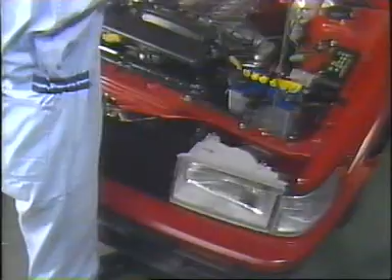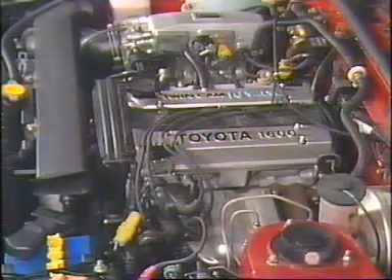In Volume 1 of What is TCCS, we talked only about EFI. Now in Volume 2, we will discuss the other remaining TCCS functions: Electronic Spark Advance (ESA), Idle Speed Control System (ISC), a special air intake control device called Toyota Variable Induction System (TVIS), the diagnostic function, the fail-safe function, and the backup function.

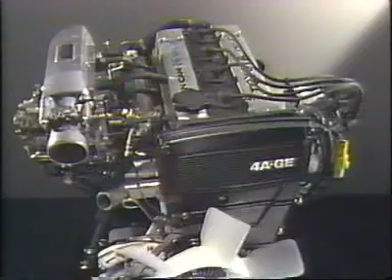The TCCS is used with various engine models, and although the TCCS construction and operation for a particular engine may differ from those for other engines, we would like you to remember that all TCCSs operate in basically the same way. In this video presentation, we will focus on the TCCS that is used with the 4AGE engine.

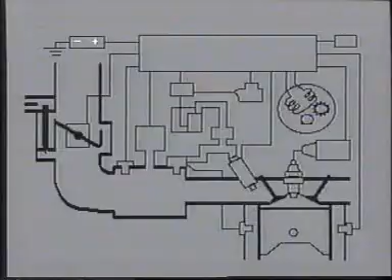Now let's take a look at the Electronic Spark Advance, or ESA. First, let's talk about the sensors. A pair of sensors is built into the distributor. One is the NE pickup sensor, which detects the crankshaft angle and the engine speed. The other is the G pickup sensor, which detects the standard crankshaft angle. The vacuum sensor detects the intake manifold pressure.

The throttle position sensor has two functions: it detects whether or not the throttle is fully closed, and it detects the throttle opening angle. When the engine is cranking, the ST terminal of the ignition switch informs the ECU of this. The water temperature sensor detects the temperature of the engine coolant.

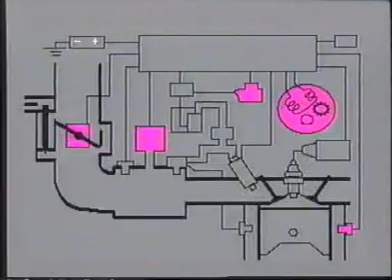Each sensor sends a signal to the ECU in the form of either a voltage or a pulse signal. Furthermore, as long as the air conditioner is operating, the air conditioner amplifier outputs a voltage signal that keeps the ECU informed of this. The ECU calculates the ignition timing that best fits the running conditions of the engine based on signals from the various sensors and data stored in its memory. It then sends an appropriate ignition signal to the igniter.

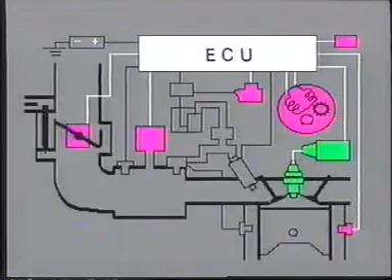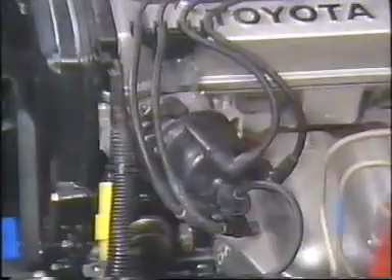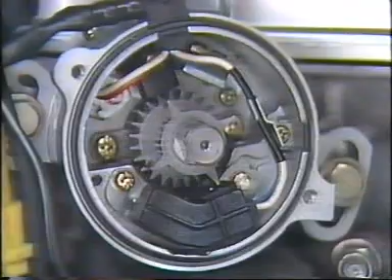Therefore, the distributor on an ESA-equipped engine is constructed somewhat differently from that used with a non-ESA engine. Let's see what a distributor used on an ESA-equipped engine looks like. As you can see here, it does not have a mechanical governor advancer or vacuum advancer.

Instead, it has two pickup sensors. As we explained before, one is the NE pickup sensor, which detects the crankshaft angle and engine RPM. The other is the G pickup sensor, which detects the standard crankshaft angle, which is used by the ECU in determining the output timing of the ignition signals.

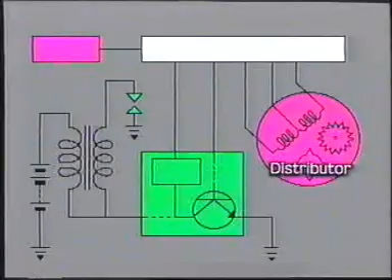Let's see just how the ESA system controls the ignition timing. We are now looking at the basic circuit diagram of the ESA. As you can see, the ESA system consists of the distributor, various other sensors, the ECU, the igniter, the ignition coil, and the spark plugs.

The ECU receives signals from the sensors that detect the running conditions of the engine. It also contains optimum data regarding ignition timing. The ECU selects an optimum ignition timing from this stored data based on the signals it receives from the sensors. Just before the crankshaft reaches the angle at which ignition is to take place, the ECU sends an ignition, or IGT, signal to the igniter.

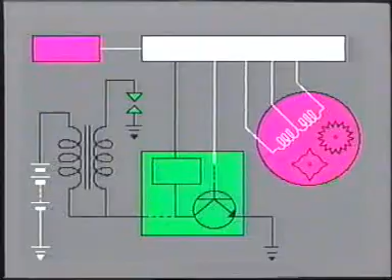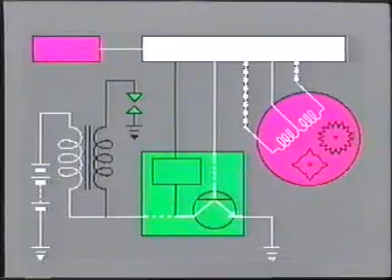Based on this signal, the igniter actuates its power transistor, causing current to flow to the primary coil. When the crankshaft rotates to the ignition angle, the ECU stops sending the ignition signal to the igniter. This causes the igniter's power transistor to be turned off, halting the flow of current to the primary coil. This, in turn, causes a high voltage to be generated in the secondary coil, causing the spark plug to fire.

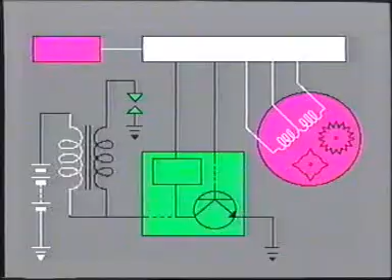At the same time, counter-electromotive force is generated in the primary coil, so the igniter accordingly sends an ignition confirmation, or IGF, signal to the ECU.

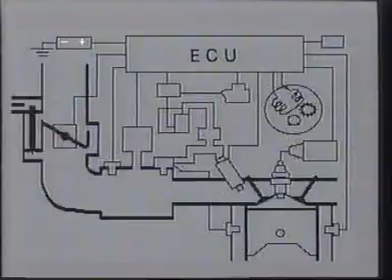Now we will see briefly how ignition timing is controlled. In the ESA, ignition advance is determined by three factors: the initial ignition timing, which is determined by the angle at which the distributor is physically fitted to the engine block; the basic ignition advance angle; and other supplementary ignition advance angles. The latter two, that is the basic ignition advance angle and the other supplementary advance angles, are controlled by the ECU.

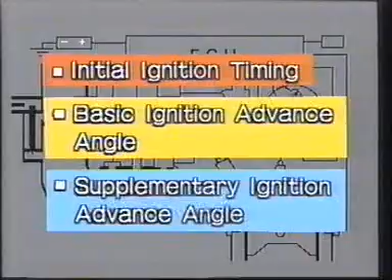Now let's see how the ignition timing is controlled in accordance with the driving conditions, beginning from the moment the engine is cranked.

During cranking, and immediately after the engine has started, the ECU cannot calculate ignition timing accurately because the engine's speed is not yet stable. For this reason, the ECU does not calculate the amount of advance when the starter motor is operating or when the engine's speed is low. Instead, the ignition timing at these times is fixed at 10 degrees before top dead center, as determined by the angle to which the distributor is physically set when mounted. This is referred to as initial ignition timing.

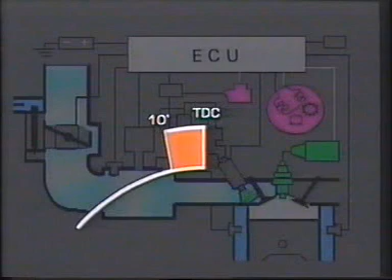The ignition timing at this moment may be shown graphically like this.

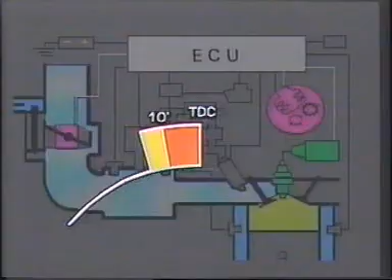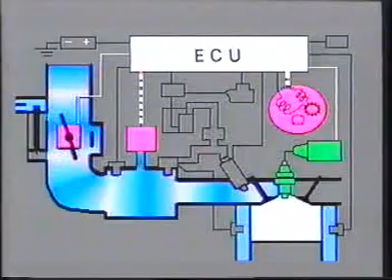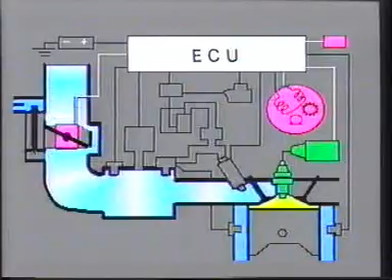Now, what will happen when the accelerator pedal is depressed? The ECU judges from the signals sent by the throttle position sensor that the accelerator pedal has been depressed. It then determines a basic advance angle based not only on the engine RPM, but also on the manifold pressure. Furthermore, the ECU adds other corrective advance angles in accordance with engine conditions, such as when the air conditioner is operating while the engine is idling, or when the coolant temperature is low. These are referred to as supplementary ignition advance angles and are shown in blue on the graph.

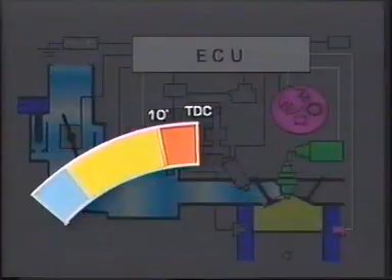Next, we'll talk about the idle speed control, or ISC. The VSV-type ISC is used with the 4A-GE engine.

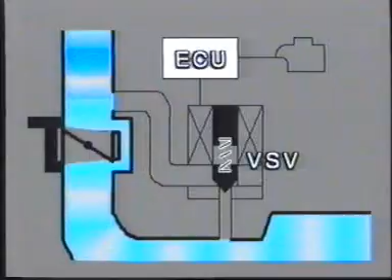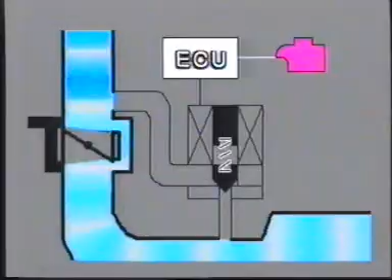We will now illustrate how the VSV-type idle speed control works. As you can see here, a bypass is provided between the throttle body and the intake air chamber. In this illustration, the bypass passage is closed off by the vacuum switching valve, or VSV. While the engine is cranking, the ECU is informed of this by the signals from the ST terminal of the ignition switch. Based on these signals, the ECU sends current to the VSV. As you can see here, the bypass passage opens up so that more air can flow into the intake air chamber. This is to make engine starting easier.

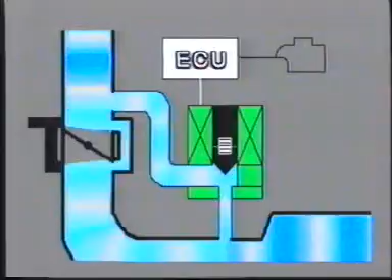Immediately after the engine has started, the ECU continues to send current to the VSV for 10 seconds in order to stabilize the engine idling speed. After 10 seconds have passed, the ECU stops sending current to the VSV.

Now, we'll discuss the Toyota Variable Induction System, or TVIS. TVIS is designed to improve the efficiency of air induction into each cylinder throughout all engine speed ranges. This is also controlled by the ECU based on the engine RPM signals. Let's look at another illustration that shows TVIS functions.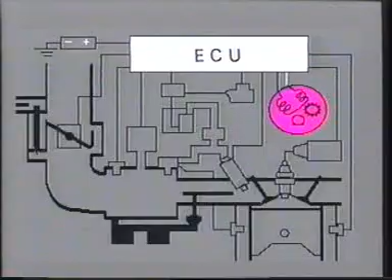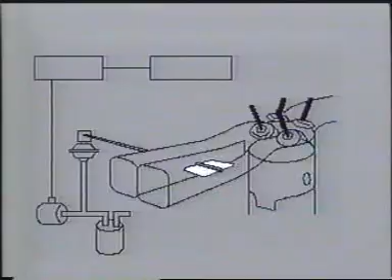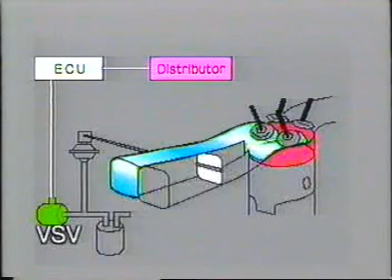As you can see here, each intake manifold is divided into 2 passages, and an air control valve is fitted in one of these passages. When the engine is running at low to medium speeds, the ECU causes current to flow to the vacuum switching valve, or VSV, to close the air control valve. Therefore, air passes through the manifold at a high speed. The air intake efficiency is improved in these speed ranges due to the inertia of the moving air. Closing the air control valve also creates a strong swirl, which improves combustion stability.

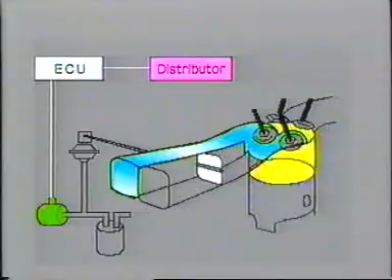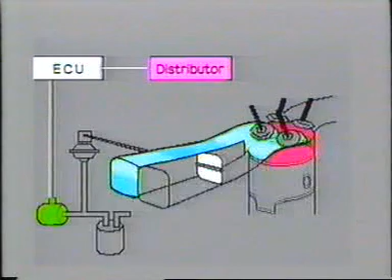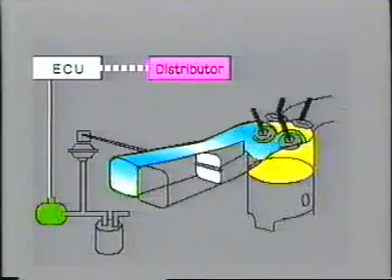However, induction resistance increases as the engine speed rises. When the engine RPM increases beyond the medium speed range, the ECU stops current flow to the VSV. This causes the air control valve to open so that a sufficient amount of air can be easily drawn into the cylinders. As we have just seen, the TVIS is controlled by the ECU in accordance with engine RPM to improve air induction efficiency.

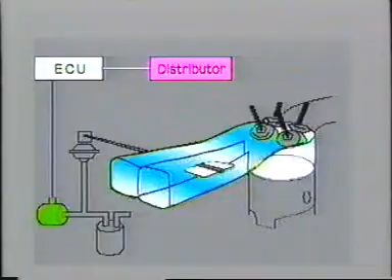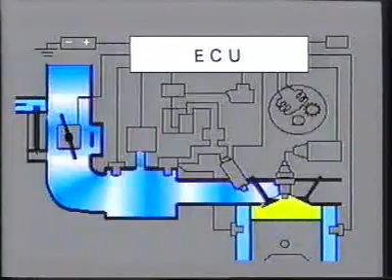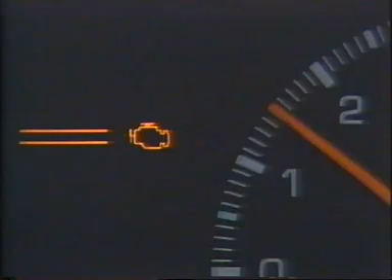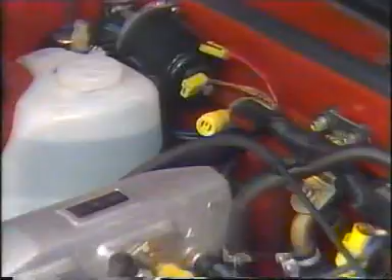Now we'll discuss the diagnostic function of the TCCS. If an open or short develops in any sensor or its related circuitry, data on this malfunction is stored in the memory of the ECU in the form of a trouble code. In most cases, the check engine lamp also comes on to warn the driver of the malfunction. The technician can determine the nature of the trouble by causing the code to be output from the ECU. To do this, he shorts terminals T and E1 of the service connector with the throttle valve fully closed and counts how many times the check engine lamp blinks.

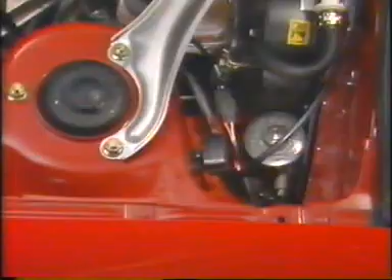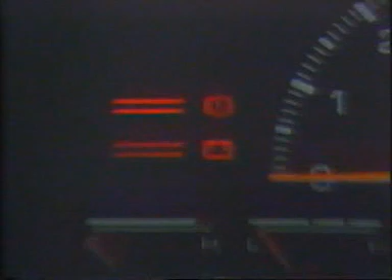Two types of service connectors are used with the 4A-GE engine, depending on the vehicle model: a 2-pin type, as was shown before, and a multi-pin type, as shown here. In the case of an AE86 Corolla, for instance, this is a code indicating a normal condition.

This is a code indicating a malfunction. This particular code indicates an open or short in the water temperature sensor or its related circuitry.

The types of trouble codes used and the way in which the codes are indicated vary depending upon the vehicle model and/or engine type. These are explained in detail in relevant repair or diagnosis manuals.

Next, let's talk about the fail-safe function.

If a sensor or its related circuitry should malfunction, the ECU would continue to control the TCCS based on the signals from the faulty sensor. This could lead to rough idling, poor acceleration, etc.

The fail-safe function is provided to prevent this type of trouble.

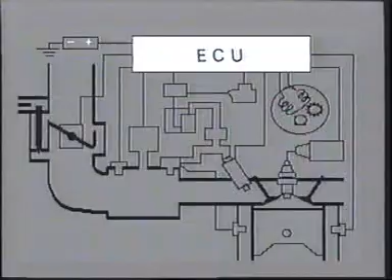First, it operates if an open or short develops in the water temperature sensor, the intake air temperature sensor, or their related circuitry. If this occurs, the ECU continues to control all systems as if the coolant temperature were 75 degrees centigrade and the intake air temperature were 20 degrees.

Normally, the fuel injection duration is corrected by these two signals. Therefore, if there is an open or short in one of these sensors or their related circuitry, the amount of fuel that is injected is not corrected based upon the coolant temperature or intake air temperature.

Furthermore, if there is an open or short in the water temperature sensor or its related circuitry, correction of the ignition timing is not carried out based upon the coolant temperature.

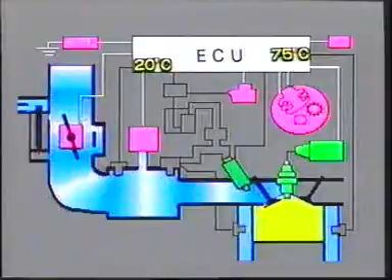Second, the fail-safe function operates if, due to an open or short in the throttle position sensor or its related circuitry, the ECU becomes unable to detect the angle to which the throttle is open. If this occurs, the ECU controls the system as if the throttle opening angle were 25 degrees.

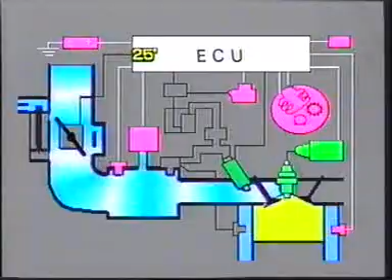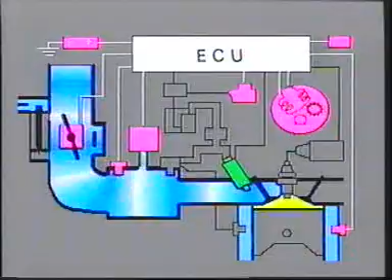Finally, the fail-safe function of the TCCS is actuated if the ECU fails to receive an ignition confirmation, or IGF signal, from the igniter. When this occurs, the ECU judges that a problem has developed in the ignition system and stops sending injection signals to the injectors.

Finally, we will discuss the backup function.

If the central processing unit, or CPU, of the ECU itself becomes defective, the ECU will become unable to output ignition, or IGT, signals to the igniter. The backup function is provided to prevent these problems.

How does the backup function of the TCCS ensure continued engine operation?

First, when the backup function is operating, the ECU selects a predetermined injection duration from the backup data in its memory based upon signals from the ST terminal of the ignition switch and the throttle position sensor. The ECU also controls the injection timing based upon signals from the distributor.

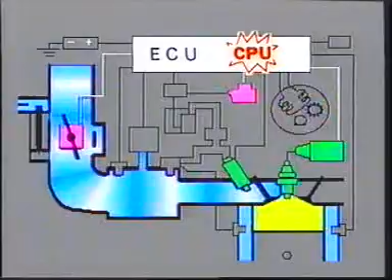The backup function also controls the ignition timing based on signals from the distributor, the ECU fixing it at 10 degrees before top dead center, that is, the initial ignition timing.

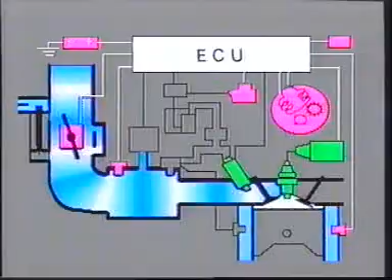The backup function of the TCCS is also actuated if an open or short develops in the vacuum sensor or its circuitry. The fuel injection duration and ignition timing are controlled in the same way as they are controlled by the backup function when the CPU becomes defective.

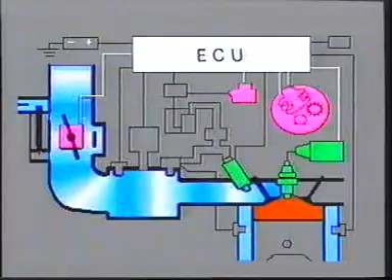The 4AGE engine was used as an example for the purpose of this technical video. In the case of other engines, functions and methods of control may vary depending upon the type of engine. However, the TCCS operates in basically the same way in other engines as in the 4AGE engine. We recommend that you refer to relevant STIs and other manuals for more details.

This brings us to the end of Part 1, Volume 2 of our video presentation on the Toyota computer-controlled system. It is important that you fully understand the contents of this technical video program. Only when you do can you say that you have truly understood the basic functions of the TCCS.